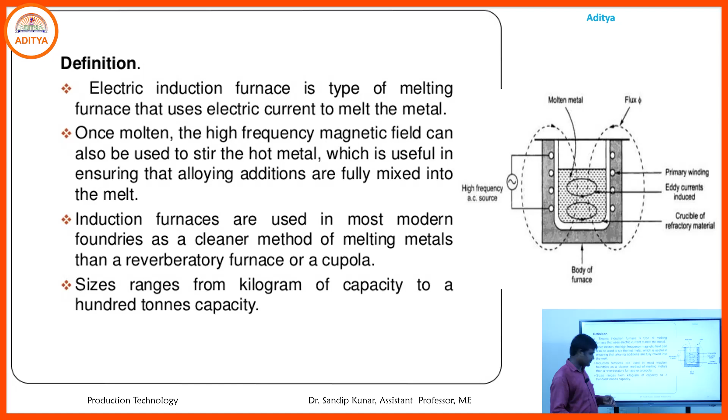The sizes range from kilogram to tons capacity in melting capacity. In that particular furnace, generally we melt metals like iron, steel, copper, aluminium, and different types of precious metals.

That furnace is a clean and non-contact process. Why is it clean and non-contacting? Because the melting has been done in a vacuum or inert atmosphere. That's why no oxide, contaminants, or impurities will be added during melting time.

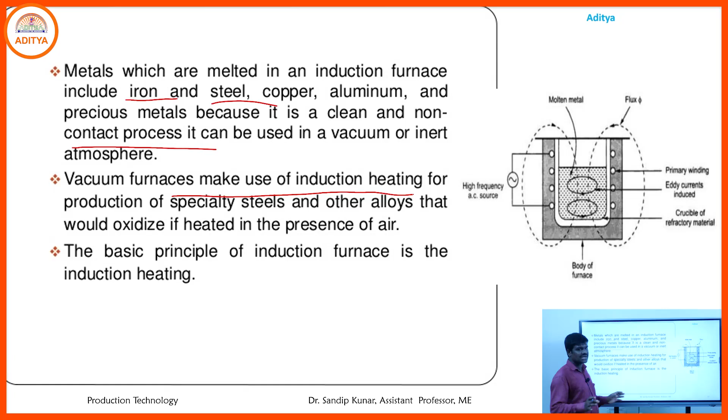Vacuum furnace makes use of induction heating, which is used for melting different metals. If we do not take the vacuum position, what happens? The melting iron will react with oxygen, and due to this reaction different oxides will be formed, which deteriorates the quality of the molten metal. So due to use of vacuum position or inert atmosphere, no oxide will be formed.

In case of induction heating, what happens? Here we use melting of conductive materials, because these are electrically conductive materials. When we keep the metal in the furnace, primary winding is there in that position, and we keep the conducting materials there.

For the primary winding we use copper coils, inside or outside the furnace. When we provide the AC source to these coils, due to that the magnetic field will be created.

Due to continuous creation of that magnetic field, it leads to Joule heating. Due to presence of metal scrap, and due to Joule heating, the temperature will increase. Due to higher temperature, the metal scrap converts into molten metal in that particular furnace.

Due to that induction heating and magnetic field creation, eddy currents will be formed. That eddy current stirs the metal in that particular furnace. That is the main principle of the electric induction heating process.

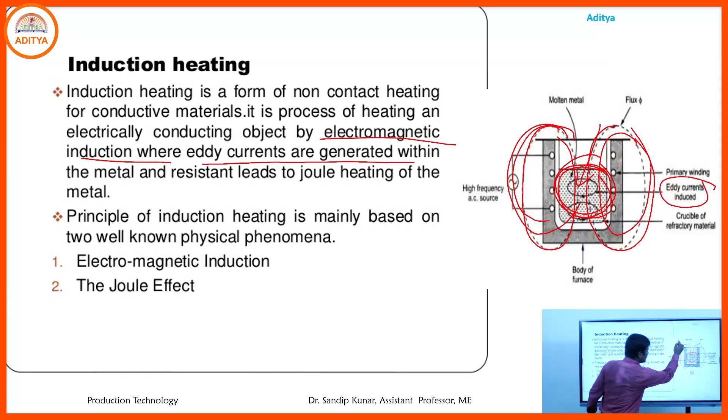Due to creation of electromagnetic induction, eddy currents will be generated. Eddy currents form due to the magnetic field, and these eddy currents lead to Joule heating. Due to continuous Joule heating, the temperature of the furnace increases, and due to continuous increase in higher temperature, it leads to melting of the metal scrap.

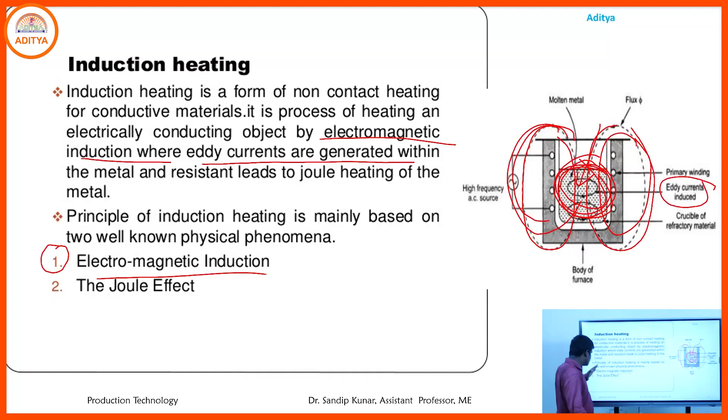Main principle of induction heating is based on, first, electromagnetic induction, and second, Joule heating, meaning the Joule effect.

What is electromagnetic induction? When energy is transferred, due to generation of electromagnetic induction, it leads to eddy currents. Eddy currents are induced in the conductive materials, meaning the conductive metal scrap, and due to generation of eddy currents, it leads to the Joule effect.

So any electrically conductive material placed in that furnace, due to electromagnetic induction, leads to generation of induced eddy current in the metal scrap, and that eddy current leads to Joule heating or Joule effect in the metal scrap.

The second principle is Joule heating, also known as ohmic heating. Due to creation of eddy currents, resistance occurs to the flow of electric current, which leads to eddy current, and that eddy current generates the Joule effect in the metal scrap.

Due to creation of eddy currents and the resulting Joule effect, heat is created, which leads to generation of higher temperature. That higher temperature helps generate the molten metal in that particular electric induction furnace.

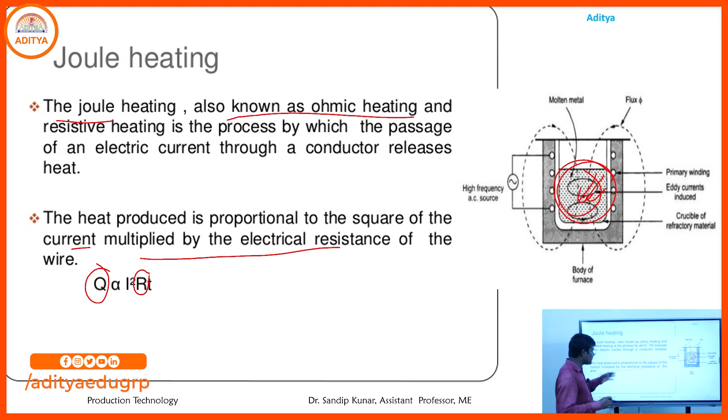The heat produced in that furnace is directly proportional to the square of the current multiplied by the electrical resistance of the wire, meaning Q, the total heat generated, is directly proportional to I squared times R, where I is the flow of current through the wire, R is the resistance of the wire, and T is the flow time of the current.

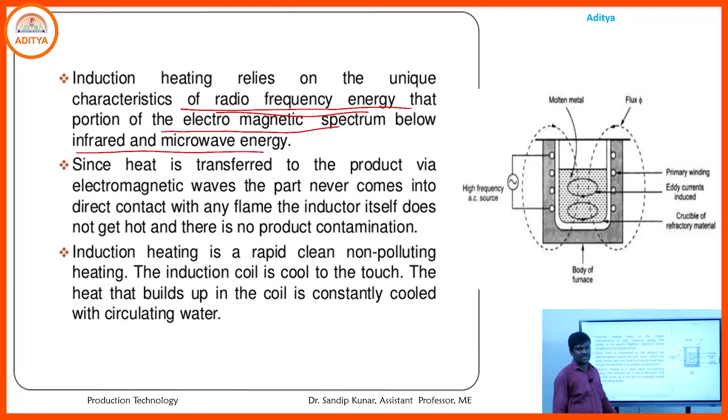Using that equation, we calculate the total heat. That induction heating depends upon the characteristics of the radio frequency energy, which allows the generation of the electromagnetic spectrum below infrared and microwave energy.

The heat generated in that particular furnace is transferred to the product via electromagnetic waves. When we send AC current to the coils present as primary winding in the furnace, providing AC current in the copper coils creates electromagnetic induction, meaning flux is created. Due to this electromagnetic induction, eddy currents are generated in the furnace, and these eddy currents result in the Joule effect or Joule heating, which helps produce molten metal in the furnace.

This is a rapid, clean and non-polluting heating process, because the melting in this particular furnace is done in an inert atmosphere, meaning vacuum conditions. So no oxides or impurities are added to the molten metal. That's why it is rapid and non-polluting heating.

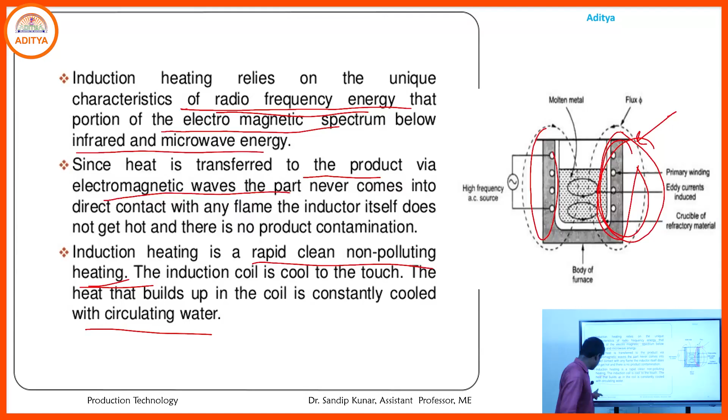Now, what are the features of the induction furnace? This furnace requires an electric coil to produce the charge. For producing melting in the furnace, we use the electric coil. The crucible in which metal will be placed is made of stronger materials that can resist the required heat, and the electric coil itself uses metal scrap that is electrically conductive.

We also use particular materials for the primary winding that can tolerate and withstand higher heat. Generally, we use copper materials for the winding purpose. What is the advantage of that particular furnace?

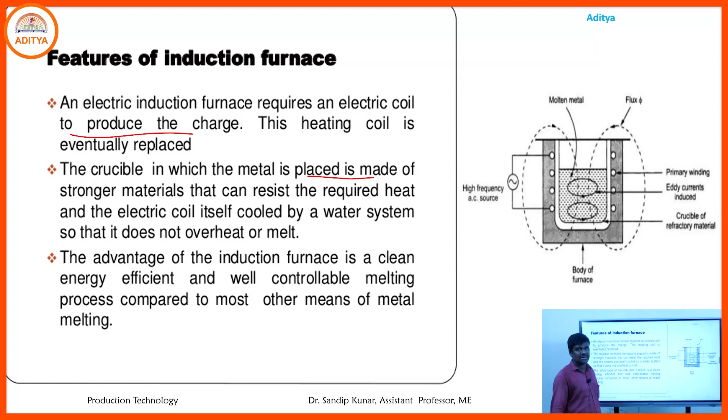In that furnace, the design of the electric furnace is centered around a basic idea: we use copper coils or primary winding inside or beside the furnace, and position the furnace accordingly. Due to the use of copper coils or primary winding, electromagnetic induction is generated, which leads to formation of eddy currents, leading to the Joule effect, and due to this the metal scrap is converted into molten metal.

So the electrical coil will be placed inside the furnace.

Generally to melt it, often the crucible is divided into two different parts. In that furnace, the molten metal settles at the bottom position, and the slag positions itself on the upper surface of the molten metal - that is the impurities part.

The lower section holds the melt in its purest form, the metal as the manufacturer desires, while the slag is deposited in the upper section of the molten metal. Due to the position of the slag, we can remove it easily from the molten metal, and in the bottom portion of the furnace we obtain the purest molten metal.

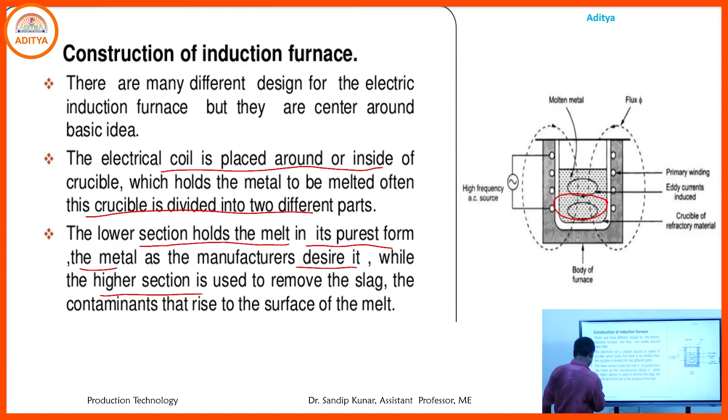What are the types of induction furnace? The first one is the coreless induction furnace. In that furnace, the coil is the heart of the coreless induction furnace - that is the main part.

In that furnace we use a copper coil, with copper tubing wound into a helical coil. Here, copper tube is present and we wind the coil around that copper tubing, and that coil shape is contained within a steel shell.

The coil shape contained within the steel shell protects and prevents overheating in the coils. Also, for protection from overheating we use a water-cooled system, meaning a water jacket in the primary winding site, for controlling the temperature, because due to continuous AC source current flowing, higher heat is generated in the primary winding, and sometimes overheating takes place in the coils. So for prevention or protection from overheating, we use the water-cooled system.

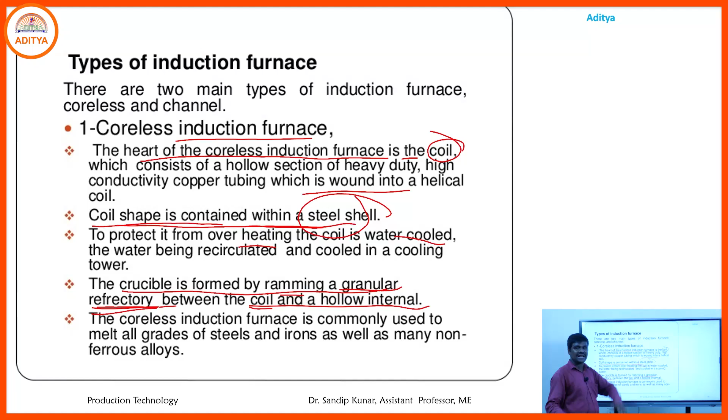Another thing, the coreless induction furnace is generally used to melt all grades of steel and iron, as well as many non-ferrous metals. All these can be easily melted in a coreless induction furnace.

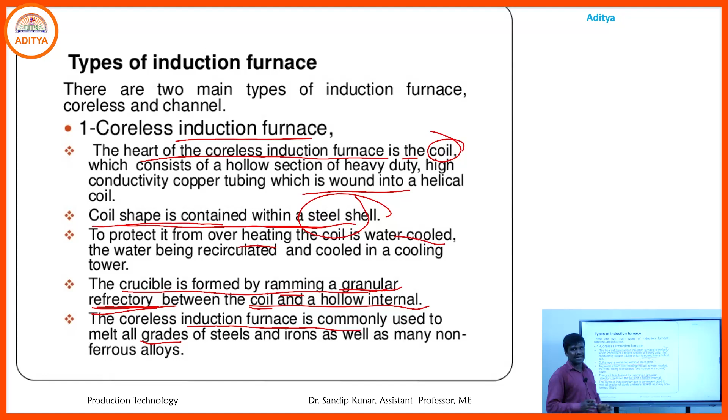Second, the channel induction furnace: what happens in that furnace? A refractory lined steel shell contains the molten metal, which is attached by a throat, and this throat forms the melting component of the furnace. This assembly forms a simple transformer in which the molten metal loop comprises the secondary component.

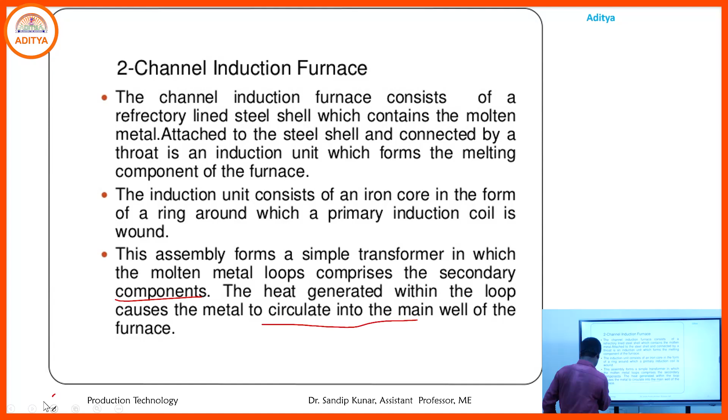Heat will be generated in the furnace, and the loop causes the metal to circulate in the main well of the furnace. This circulation of the molten metal causes stirring within it. The channel induction furnace is commonly used for melting low melting point alloys and also for holding and superheating in that furnace unit.

What are the different advantages of this furnace? First, higher yield, meaning the heating takes place in an inert atmosphere or vacuum condition, and due to that it does not form any oxide or contaminants during melting. It is also a non-polluting and clean melting furnace compared to others.

Faster startup: when we apply power to the furnace, it instantly starts heating, and due to this heating it also starts melting.

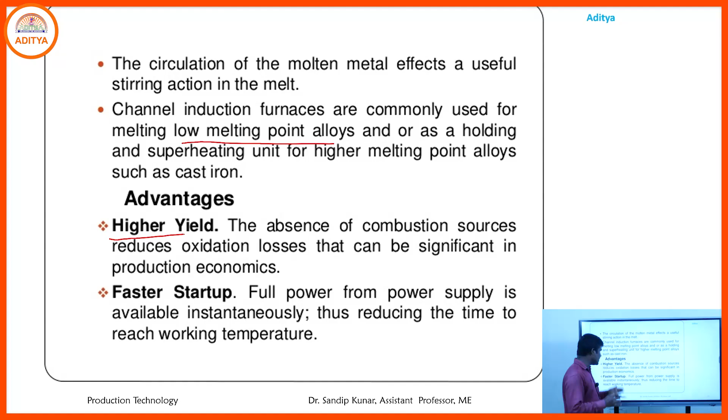Flexibility: no molten metal is necessary to start the medium frequency coreless induction heating equipment, meaning no extra molten metal is required for melting.

Another advantage is natural stirring, meaning the assembly creates a strong stirring action resulting in homogeneous melting. Due to formation of eddy currents, homogeneous stirring takes place, and the molten metal mixes homogeneously in the furnace.

Another advantage is cleaner melting, as I mentioned, because the melting of the molten metal takes place in an inert atmosphere, so it is a clean, non-contacting, non-polluting furnace.

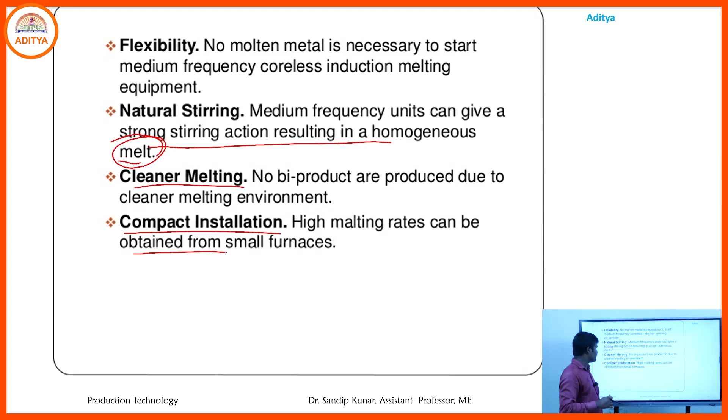Another advantage is compact installation, so high melting rates can be obtained from small furnaces. Regarding energy conservation, induction melting efficiency generally ranges from 55 to 75%, meaning overall energy efficiency is higher compared to other furnaces.

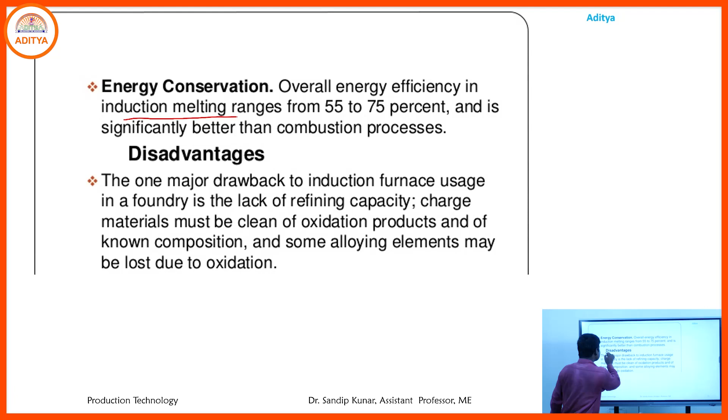What are the main disadvantages of this furnace? One drawback of this furnace is the lack of refining capacity, meaning it has no refining capacity.

If charged materials are used, they must be clean of oxidation products. If oxygen enters the furnace, oxidation will occur and oxide will form in the molten metal. So generally the entire setup of the furnace must be free from oxide formation. The main drawback of the furnace is that it has no refining process.

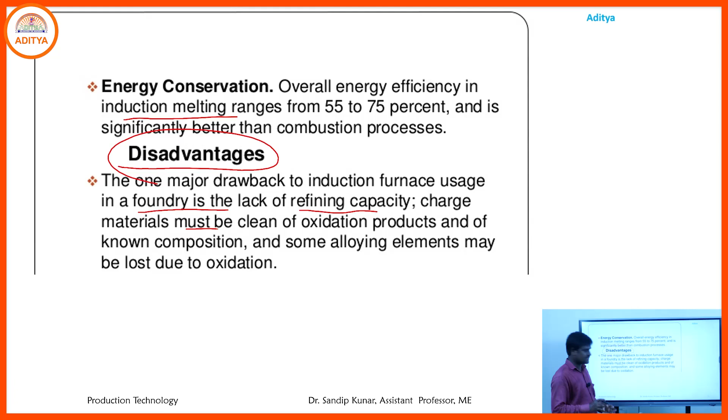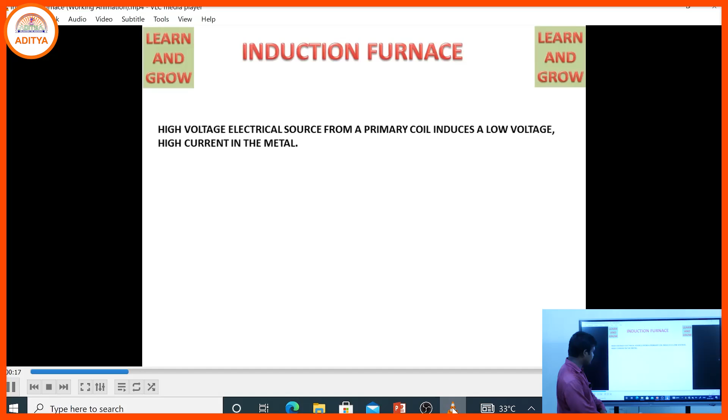Generally, in case of an induction furnace, what happens? A high voltage electric source from a primary coil induces a low voltage and produces high current in the metal. Melting takes place using the principle of electromagnetic induction.

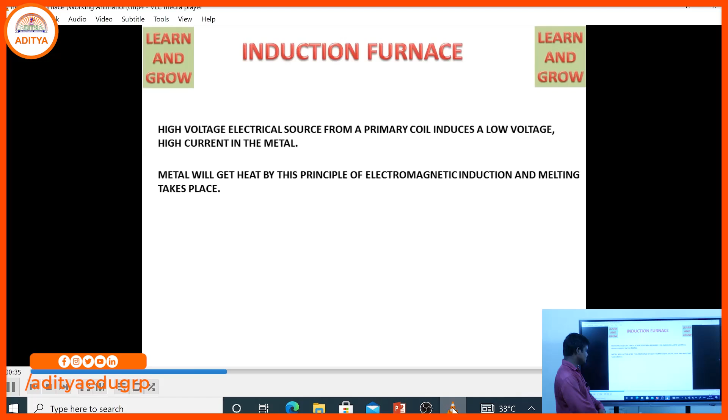That is the main chamber of the furnace, and inside it a refractory lining is used. This is because it withstands and tolerates higher temperatures. Beside this refractory lining, we have used copper coils.

We connect the copper coils to the AC source. Then we enter the metal scrap into the chamber or furnace, keeping the metal scrap inside.

Then we start the power, providing AC source to the copper coils, and due to this, electromagnetic induction will be created. This creates electromagnetic flux, and due to this flux, eddy currents are created, which lead to the Joule effect.

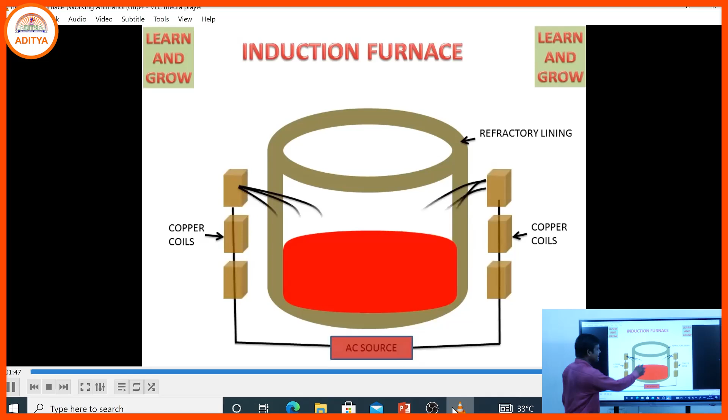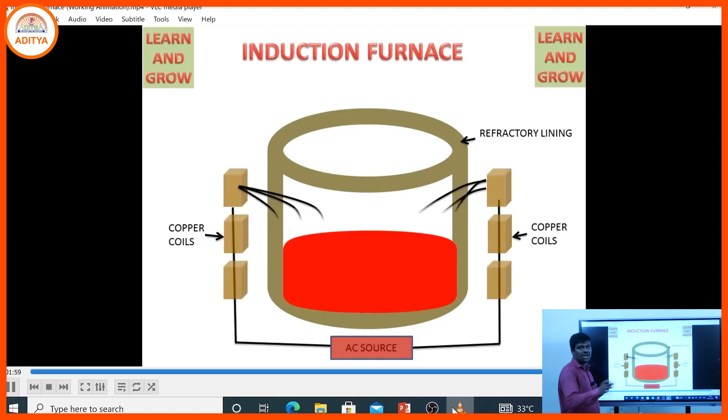Due to the Joule effect, the temperature increases and the metal scrap is converted into molten metal. Slag is kept on the upper side and removed through the slag hole, while the purest molten metal settles at the bottom of the chamber, which we then take out through the tap hole.